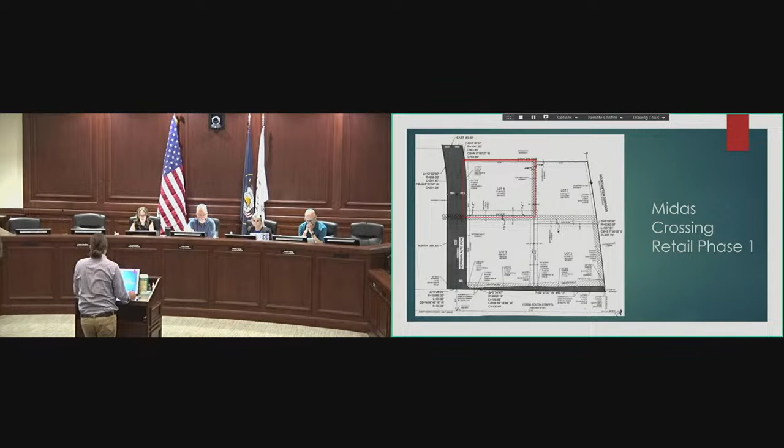This is a conditional use application for Garage Plaza. It's located just down the street off 126, next to Garage Grill. There's the site, it's part of the Midas Crossing Retail Phase 1. Lot 104 is where the proposed development's going on lot 4.

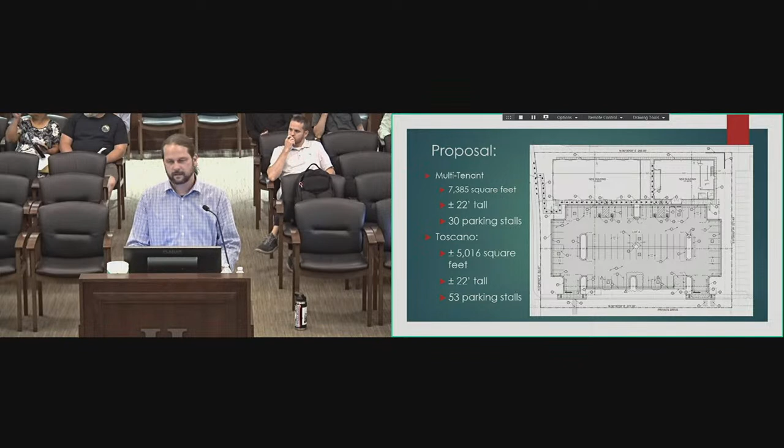The proposal consists of a 7,000 square foot multi-tenant structure and a Toscano's restaurant. The multi-tenant building is about 22 feet tall, and they're providing 30 parking stalls. Toscano's is 5,000 square feet, again about 22 feet tall as well, and 53 parking stalls. I want to say, I think I'm actually incorrect on the 22-foot tall on the Toscano's, I believe it's closer to 32 feet.

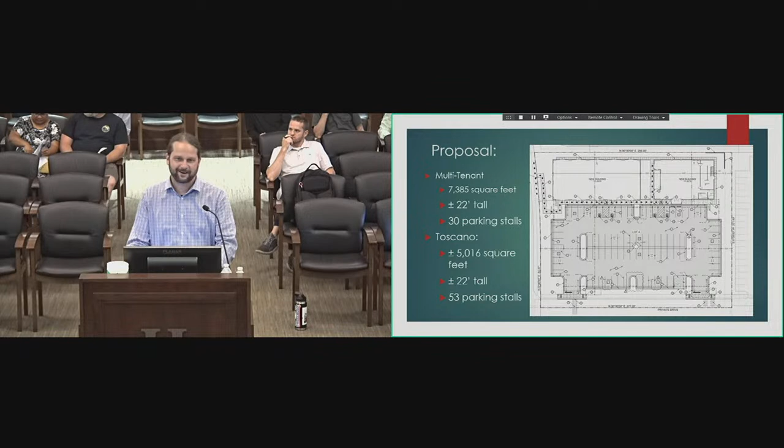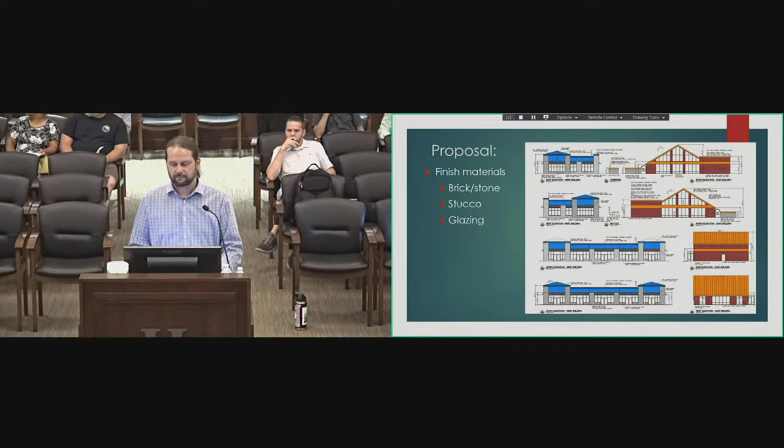Sorry about that. The proposed materials are brick and stone per our C2 design standards, 60% brick or stone on all facades, and they are meeting that requirement. Again, with some additional stucco and some glazing, as we talked briefly in the work meeting regarding their accent band that runs across the building, that is a metal material. It's not part of our permitted finished materials for commercial, but we're looking at that as more of an accent strip, therefore we still feel it meets the spirit of that design standard.

Again, staff findings, there are a few things we considered, a few issues we'd like to address here with the commission. One is the parking. Per ordinance, the required parking for the multi-tenant is 30 stalls, which they are meeting, but for the restaurant it'd be 120, therefore the applicant found that to be a little excessive.

They did provide a parking study. In that study, based on similar uses and taking into consideration the cross parking between lots 101 and 104, they found that to meet their maximum peak times would be 86 parking stalls, and peak time offset would be 83. The applicant is proposing 83 parking stalls.

Staff does recommend and support the 83 stalls, but would recommend that they actually add an additional pedestrian connection between lots 104 and 101, just to provide convenient access for pedestrians if the overflow does go into Garage Grill or vice versa.

On landscaping, there's just one issue that needs to be addressed: along Herriman Auto Row, they're showing a 15-foot landscape buffer on the parking area. Per ordinance, they have to install a 2-foot berm to get that reduction from the required 20-foot buffer.

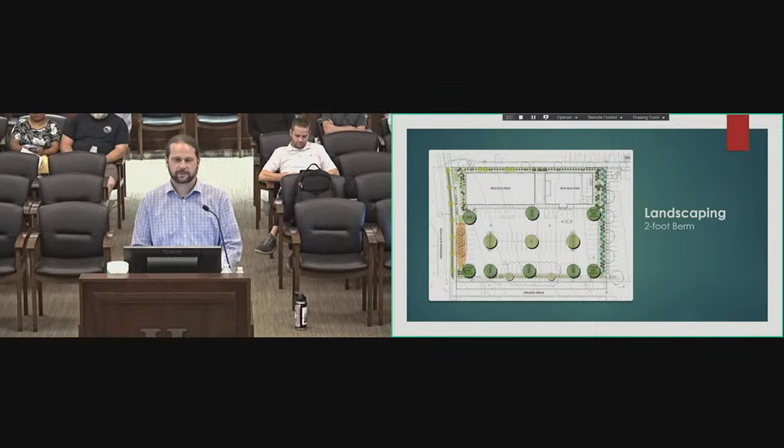Outside of that, staff does recommend approval with the following conditions. If you guys have any questions for me, I'd be happy to answer.

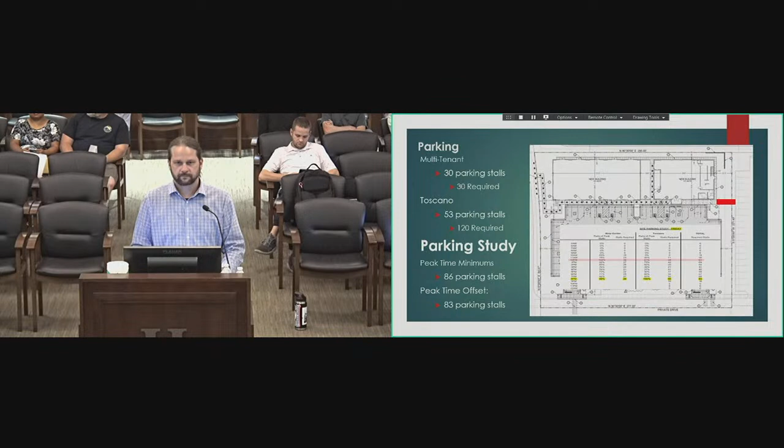I was noticing that pedestrian crossing you were proposing out there — it looks like it's going right into their parking lot on the other side. Is there any concern with how that's tying into the parking lot? There's not really a pedestrian path that it connects to in the other lot.

Right, so they'd have to remove some landscaping to install that. The alignment may be skewed a little bit, so it runs into an actual parking stall, meaning they're not losing 2 stalls or having to restripe their entire parking lot to accommodate that access.

Looking at the plans, there's about a 2-foot grade difference between the Garage Plaza and the Garage Grill site. Since this isn't the primary pedestrian access to the site, it doesn't have to meet ADA requirements, so it could be stepped down with handrails if required per building code.

But they probably will lose a parking stall on that side too when they make this connection. As mentioned, the Garage Grill was required to have 99 stalls and they provided 113.

The applicant says they rarely meet that capacity at Garage Grill, so losing one stall shouldn't be detrimental to parking availability there. That's the only other improvement that would have to happen on the Garage Grill side — they'd just probably restripe out a parking stall.

Yeah, okay, perfect. Andrew, did you have a question? So I had a question.

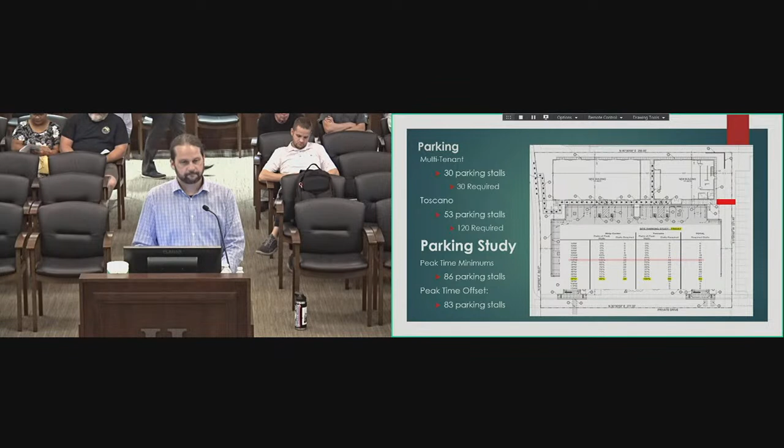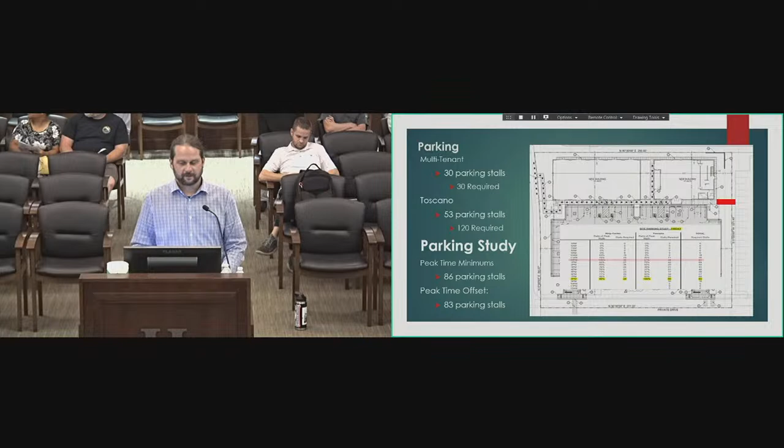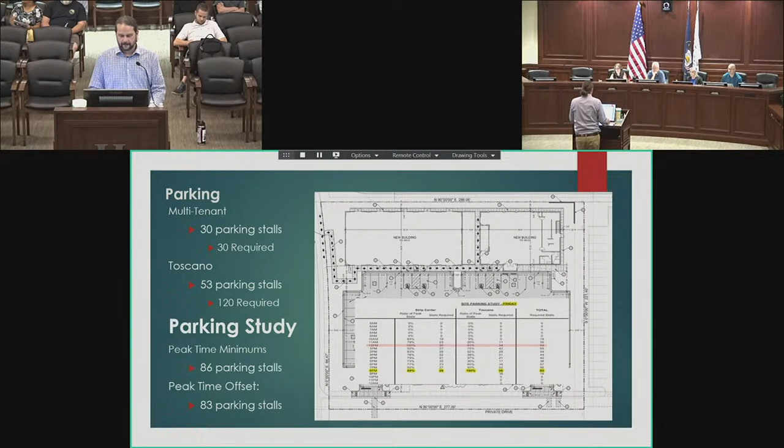If it is underparked and the Garage Grill parking lot is full, where would customers be able to park? Is there street parking nearby they could use, or where would that force them to park? In a case where everything hits its maximum — that's a good question. I'm assuming the shoulder's wide enough that they could probably push that onto Auto Row.

I don't know if that's preferable or not. Again, there's a private access that runs there — they could potentially park there. Or maybe they could open up some of Lot 3, which is undeveloped, to push some of that overflow parking in there if needed.

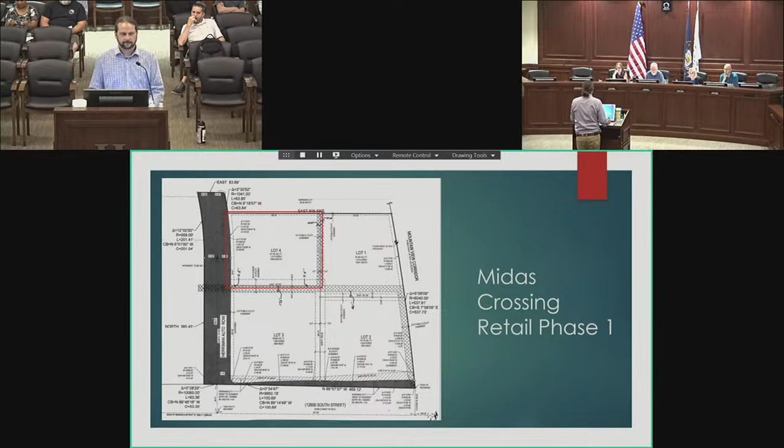Is there a proposal for Lot 3 yet, and is it owned by the same person who owns the other lots? My assumption is — I'm not sure if the applicant owns Lots 2 and 3. They may be able to answer that, but that's a good question for them.

Any other questions for Sheldon? Okay, good, all right, thank you.

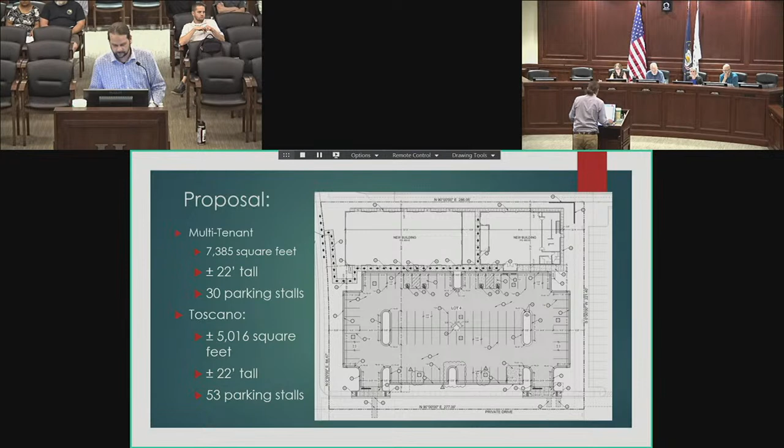All right, if the applicant's here, I'd like to invite them to come forward and provide any additional information. You've heard some of our discussion, maybe answer some of those questions for us. My name is Steve Pruitt.

With regard to the questions that were brought up, in addition to the extension of the sidewalk into Lot 1, there's also an accessible pathway all the way from Auto Mall Drive to the front door of the Garage Grill. So that would make 2 accesses in terms of pedestrian capability.

In terms of overflow parking, we certainly hope we have that problem — we'd love to have it. That being said, there is a recorded operating and easement agreement that provides reciprocal parking, ingress and egress over all of Midas Crossing, all 14 lots of it. So we have the ability and the right to park on the lots that front on 126 South, to the extent that we would ever need it.

Whether improved or not, we have the ability to park on it. I don't like guests to have to park on dirt, but hopefully it'll be fully developed soon enough, and there will be plenty of shared parking as it goes.

Any other items you want to present to us? No, we're fine with all of the conditions for approval. Great, okay, well, thank you, appreciate your time.

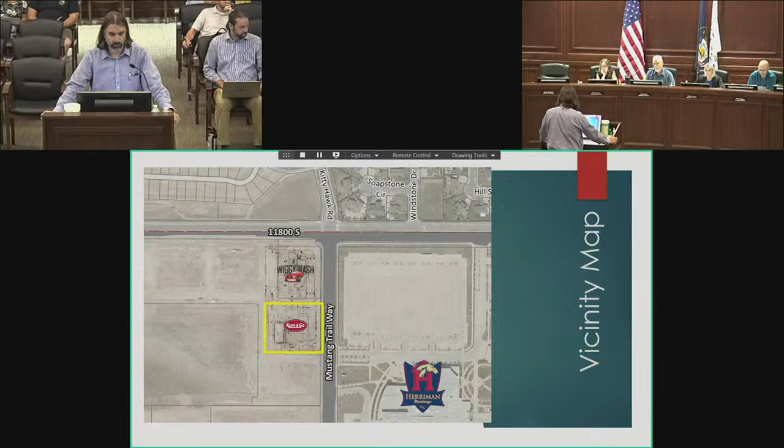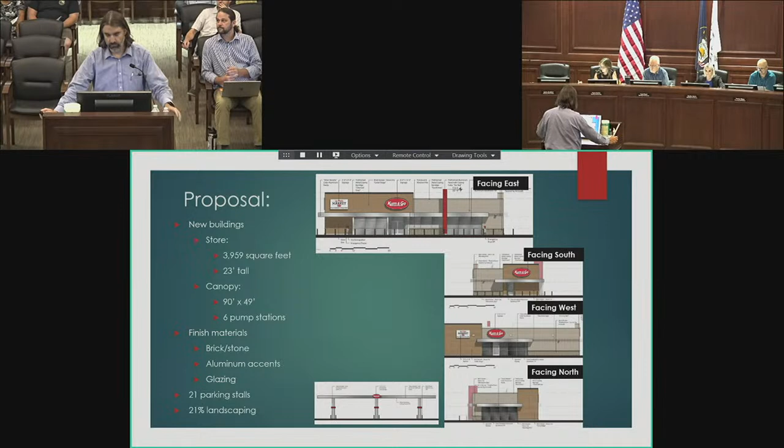So what is being proposed is very similar to what other proposals have been. The store is approximately 4,000 square feet, 23 feet tall. The color and materials is very similar to what's been proposed, as well as the canopy. So you can see those requirements here. They're providing 21 parking stalls and 21% landscaping.

This is the site plan, just to kind of get you oriented with how the site works. So on the right side, running north and south, is Mustang Trail Way. Wiggy Wash - you can see the dashed lines represent the Wiggy Wash site plan. So the store is set back from the street, the canopy's out front. There's two entrances, both of them off of the private streets that are provided in the subdivision.

Dumpster location is on the north side of it as well. So there is good pedestrian connections through here. It ties into the existing right-of-way improvements on Mustang Trail, and then there's a complete sidewalk around the building, which provides good access for both pedestrians and bicyclists who use that site.

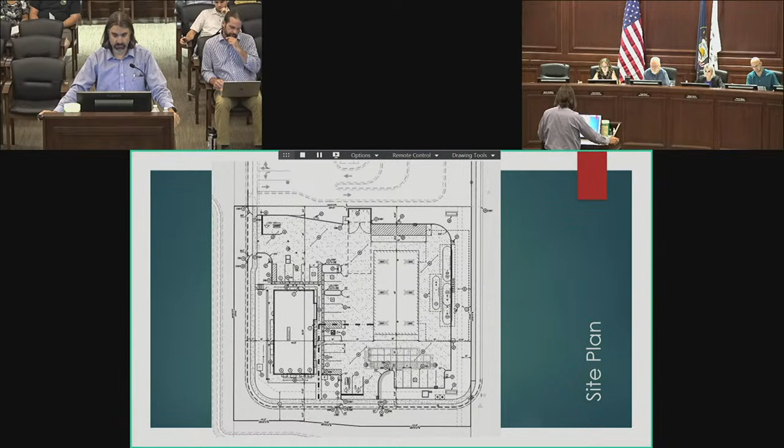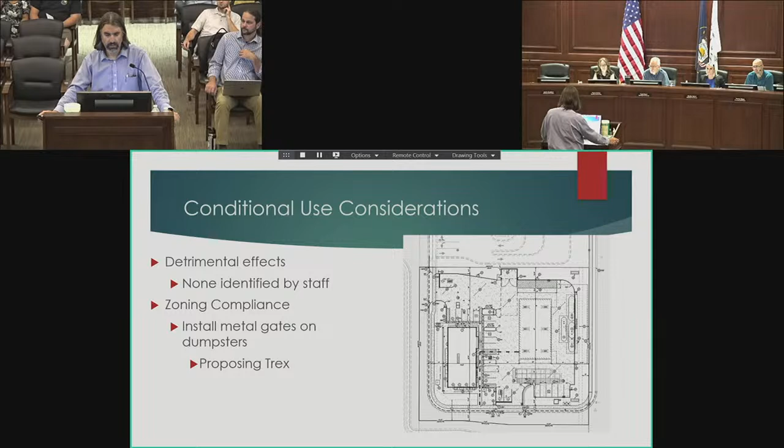So when we look at detrimental effects in the conditional use, there's only a couple of real concerns that we have - actually, we don't have any concerns in terms of detrimental effects. There is a zoning compliance issue, and that would be to install metal gates on the dumpsters. They're showing Trex material, and the city does require those fences or gates to be metal - they seem to last a little bit longer.

So this is the caveat of tonight's discussion. In the MDA there's a provision - there's a couple of sheets, B and B1, I want to say, that outline the colors and the color palette and materials for this development. As Wiggy Wash came in, they were required to - they're a national brand, but they were still required to fit that color palette, and they did so. So there's a section in the MDA that speaks to national brands.

And says that that national brand form and function can continue, but they do need to comply, as staff interprets it, with the color palette of the MDA.

So what's being proposed is similar to what's been proposed at other Kum & Gos. And the material in question is the bright white canopy, or the bright metallic canopy, and the bright aluminum finishes on the storefront and the building itself. The master developer has provided a letter stating that these elevations do comply with the MDA.

But as we looked at it as staff, we do have some concerns and are looking for some clarification from the commission in terms of how this section affects the site and the materials being proposed there. As mentioned, this statement says that a national tenant can continue their national branding, but about halfway through it says those colors and materials should still be followed to provide consistency in the project.

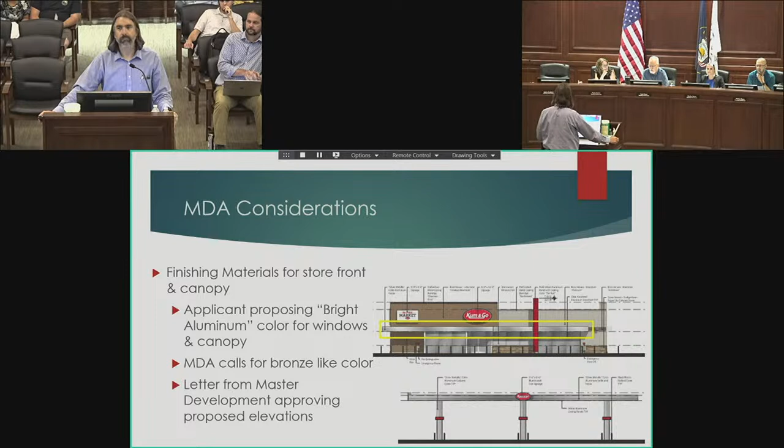So the other ones do have that Copper Mountain color? No, the other ones have the bright aluminum finish. Clint, I have a question—you said that the Wiggy Wash next door was required to use these MDA colors then? Yes. Okay, so the precedent has been set for that. Gotcha.

Okay, any other questions for Clint? I'll leave this slide up so you can look through it, if you'd like, for interpretation's sake. That would be great. The applicant is here, I'm sure they'll address this. Yes, yep, that's the next thing we'll do.

Thank you. We'll go ahead and invite the applicant to come forward to provide any additional information. You've heard the discussion on the color palette as well, so is there anything more you'd like to add?

My name is Taylor Smith. I work with Galloway & Company. We've done the survey and civil engineering on this and the entitlements. We've been working closely with Clint and staff on all the Kum & Go projects here. To answer your question, Commission, we do have one that is built right up the street and one that started construction two weeks ago in Midas Crossing off 126 there.

And we do have another one we're getting ready to submit next week for over by Real Academy. But they all will have that same metallic, silver finish on it. We worked with the developer also on this coloring, and they provided us letters to be able to keep our national brand. Kum & Go has been a family-owned company for over 60 years now, and they've kept these colors—it's kind of a nationally recognized color for them.

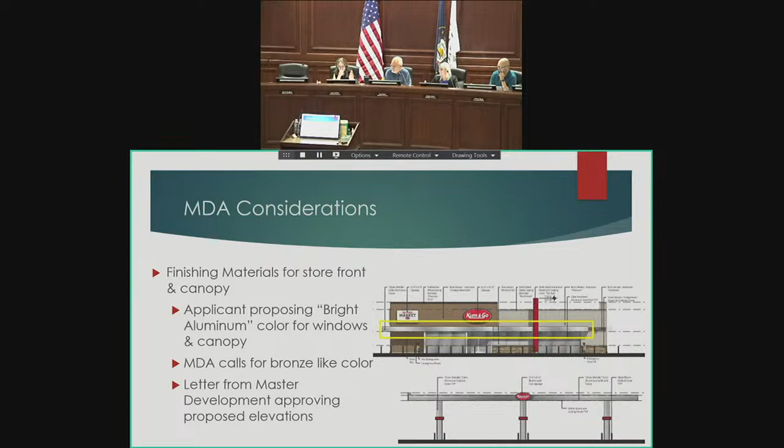Couldn't they technically do that all red too? That's not on the color palette - I mean, there was a reddish color over there. You're saying bronze? No, there was like a reddish color. Yeah, that's bronze, or copper, or whatever. That's the one that might clash a little - it looks reddish, so it's hard to tell.

Again, I get back to master developers provided their thoughts and their approval on it. But an MDA does not mean that the master developer gets to sidestep the actual MDA document - I don't think they are sidestepping that document. The colors being proposed are on the palette. They're not shown here, but they are in the MDA, from what was provided. That color is there in the MDA that they are proposing. I think the intent in the MDA language was national user, and I agree, they've come with our letter of approval.

So I'm ready to make a motion whenever. Okay, go ahead - can we go to the recommendations, please? Thank you. I'll make a motion to approve item 4.2 with staff's 3 recommendations, removing number 2. We have a motion by Heather, and a second by Andrea. We'll go ahead and call for a vote. Preston, yes. Heather, yes. Andrea, yes. And Forrest, no. Okay, that item passes with a 3-1 vote.

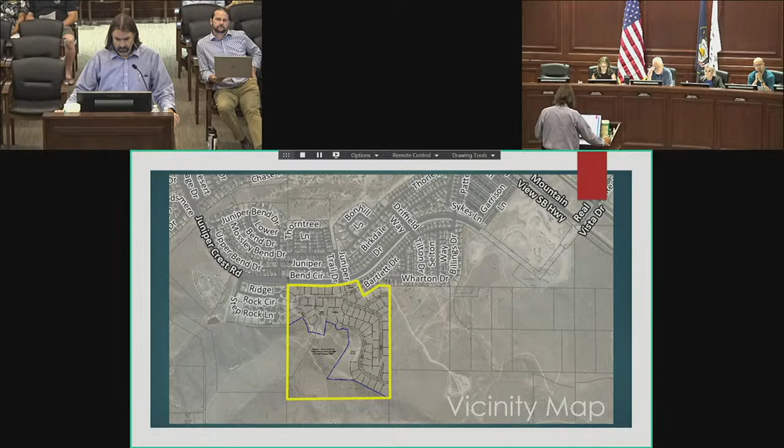Consideration of a preliminary plat for Laguna Pointe subdivision. The location of this subdivision is on the south side of Juniper Crest. This is an outline of the subdivision, put in context with the surroundings. It's 68 lots, getting their main access off of Juniper Crest Road, and other access provided through Bartlett Drive. The proposal is for 68 single-family lots of about just better than a third acre and larger. The property is currently vacant.

Considerations for approval: in terms of engineering, there's minimal concerns there. There was a condition brought up later that we discussed in our pre-meeting today, and it has been recently discussed with the applicant regarding the lots fronting onto Juniper Crest Road - improvements required there include a 6-foot masonry wall, an 8-foot paved asphalt trail, and street landscaping with trees and minimum shrubs for coverage.

There was a concern from the fire marshal regarding the accesses. They are providing 2, but because of the adjacency of those 2, there needs to be a larger separation. In terms of zoning, there is a zoning condition on the property for a maximum of 1.7 units per acre. They're providing 1.67, so just under that.

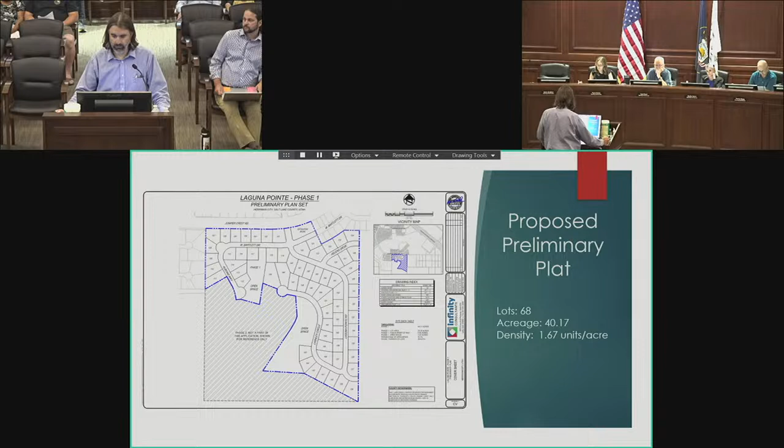This is where, as I mentioned before, they are providing 2 accesses, but because of the proximity of those, the fire marshal had a concern that in order for them to record and develop more than 30 of these lots right now, they would have to provide an additional access that the fire marshal would approve, giving a further distance of separation from those 2 access points. In our conditions of approval, that's our one condition, other than installing the right-of-way improvements along Juniper Crest, which would include that masonry wall, the 8-foot asphalt trail, and the park strip improvements.

So, that being said, yeah, I concur with the fire marshal there - if there's any issue right there at that one intersection, you're blocking both accesses. So that makes complete sense to me.

And they could still move forward with 30 lots as it is. Right - if they want to work with the fire marshal on providing that second access before they record and get that approved, then we can record all 68 lots. Perfect. Any questions? Okay.

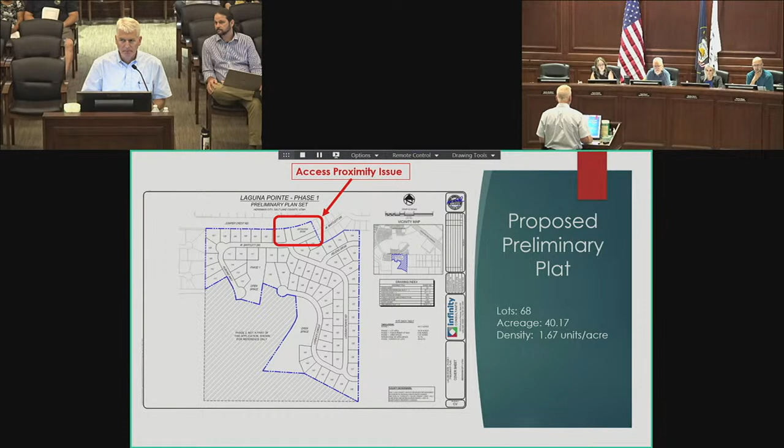I don't know how that affects lot 112 for you, but we'll look at that as we go to the next step. Good comment. Any other questions? Okay, thank you.

All right, this item, as mentioned, is up for a public hearing. At this time, I will open up the public hearing for any comments on this item. Seeing no comments, I'll look for a motion to close the public hearing. I'll make a motion to close the public hearing. We have a motion by Heather, second by Andrea. All in favor? Aye. All right, we'll go ahead and close the public hearing at this time.

Any other discussion from Planning Commission on this item? Maybe just a quick question for staff. So on lots 144 to 138, those areas are part of the hillside overlay zone, right?

Partially, if you go to the map that shows the hillside overlay, there's a figure that shows that. I did notice that as well. Yeah, you can see that overlay zone goes through those lots. Right, so those lots would be affected by that hillside overlay, which speaks to how those need to develop. They just need to provide some additional information in terms of hillside safety and grading. On the plat itself, it does show a 30% slope line where they can't even touch those slopes.

But the rest of it could be developed, and these are larger lots. So there is still developable room, plenty of room to put homes. But is the city okay with how it's looking right there with the line going through those lots? There's special conditions it sounds like that the developer would have to do.

To do anything else within those limits. Right, and sometimes that can even go into more of a detailed study of the property. I think when the hillside overlay was done, it was on a rougher scale. As they come in for each of those, and as they've done on their preliminary plat, they've shown that 30% grading slope through those properties.

That gives us a little bit better idea of where those 30% slopes really exist. Our hillside ordinance or hillside overlay is just to keep tabs on where those impacts might land on certain developments. So with a more specific design in place, we can better mitigate and require improvements for when they're actually built out.

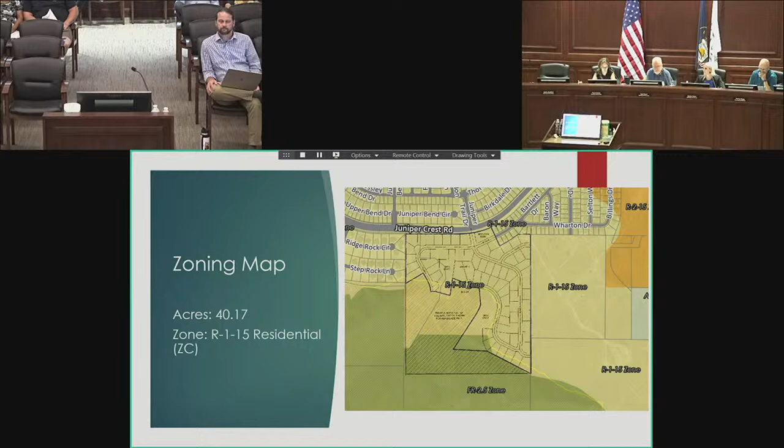Anything else? Thank you. Any other discussion, any other thoughts? Your motion? By somebody other than Heather? I'm kidding. If Adam was here, he'd be doing them all too.

So, I'll go ahead and make a motion to approve item—which one is this? 4.3, along with conditions 1 and 2, with a modification to 2, that is working with the fire marshal to provide appropriate access. Permanent access? Yeah, that the fire marshal would approve, to meet the fire marshal's requirements.

Okay, and then didn't staff have a third condition for the lots 101 to 107? Oh, and a third, we didn't discuss that. Let's withdraw that motion, let's have a quick discussion. I'll go ahead and withdraw that motion. Yeah, sorry, Forrest. Did you write those down? I've got them written down here.

But let's talk about it quick, and maybe we need to make sure the applicant's okay with this as well. If you go back to the map, lots 101 through 107 that are adjacent to Juniper Crest Road, we want to make sure there is an 8-foot asphalt path installed along there, as well as a precast wall, and that the park strip landscaping for these meet the updated city standards. I believe that was the recommendation there, so.

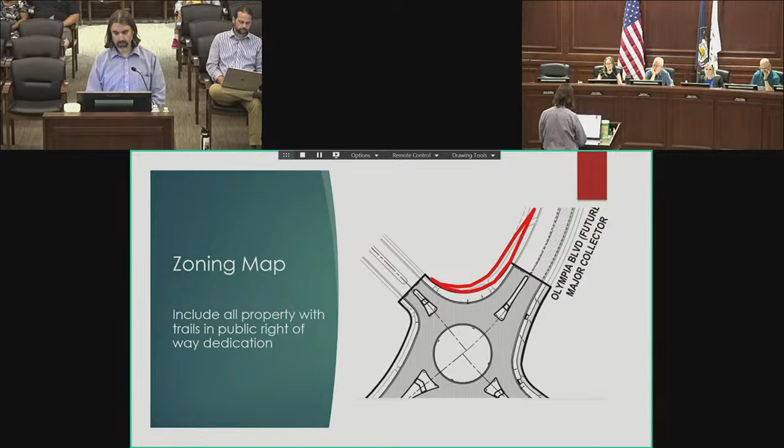In terms of engineering, very few concerns. For zoning, the only correction we would have, as you look through the plat, there was one section highlighted red. Wherever you have a trail that acts as kind of a public access or sidewalk along the adjacent roadway, we just want that included in the dedication to the city for maintenance and access and all those kinds of things. So that's the only caveat there.

In terms of MDA compliance, they do comply with their MDA that they've provided. We've been working for quite some time, going back and forth with the developer on several issues. They've been very cooperative and provided quite a few betterments for the development to make it a little bit better than most.

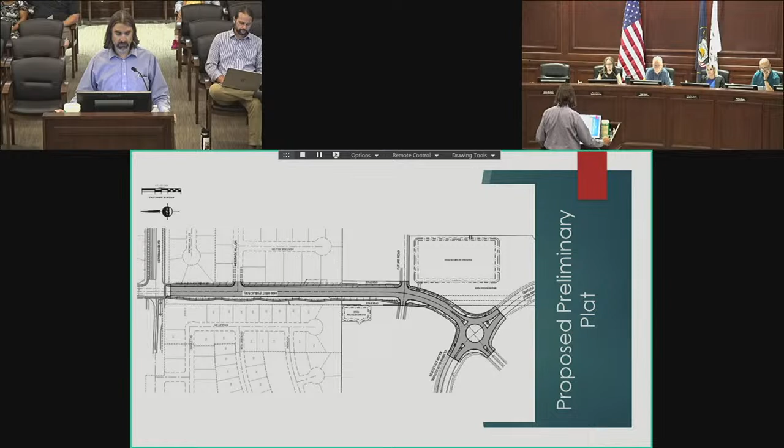And then the design of the roundabout here provides quite a few pedestrian amenities. You get a lot of pedestrian islands where that road could be quite large, giving you an island to go out and rest on until you make your way across the entire swath of road there. Better than most landscaping plans as well.

So that being said, these are the conditions there. They're, like I said, very minimal. And if there's any questions, I'd be glad to answer them.

The applicant is also here on this one. Great, thank you. Any questions for Clint?

Well done, I like the roundabout. It looks really nice, looks really good. Good design, good landscape. Okay, we'll allow the applicant to come forward and provide any additional information.

Anything more on this item? We're going to probably see you a lot tonight on this dedication tonight. We're up for a few of them.

I'm Kirk Young with the development team. Just wanted to stand up and thank you for allowing us to come forward tonight, and thanks to all the city staff for the hard work that's gone into this. It's been a lot of hours of meetings and reviewing drawings, so we appreciate it. We're really excited to get Olympia started and appreciate your time.

Thank you. The staff also gave you a great compliment during our work session, so thank you for what you're doing. Any questions before we let them sit down? No, that's fine.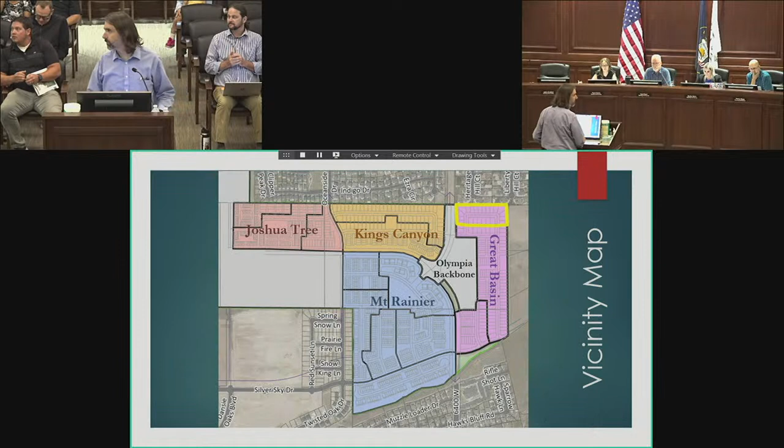Going to the subject property, this colored map gives an overview of all the applications we've received so far from the Olympia Group. The MDA states the only plats that need to go through a public process to the Planning Commission are those lots and developments directly adjacent to already privately owned and developed residential lots. For example, Great Basin is all of that purple area, but we're only looking at this one phase of development directly adjacent to the existing lots above it. Same with Kings Canyon. As you move over to Joshua Tree, all three of those phases have frontage onto privately owned lots, so that entire development will be considered tonight as well.

So going back to Great Basin, this is a very simple proposal. We're looking at 22 residential single-family detached lots. Minimum lot width is about 50 feet. The density meets the MDA requirements. The access is one thing I might point out.

As we just looked at that Olympia backbone, you can see that in order to get to this development, you have to go down 6400 West, and then through a neighborhood street, that Great Basin Phase 1, where that entrance street off the major backbone street comes in, and then you'll get access into that subdivision. That's reflective in our conditions of approval, and I'm certain that's the way the developer intends to develop this.

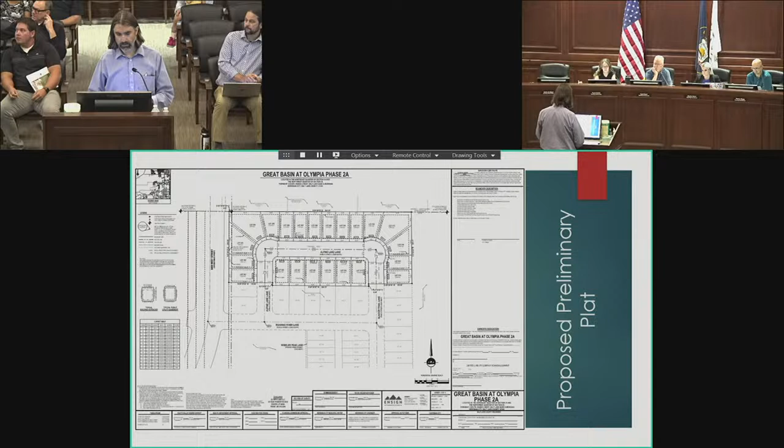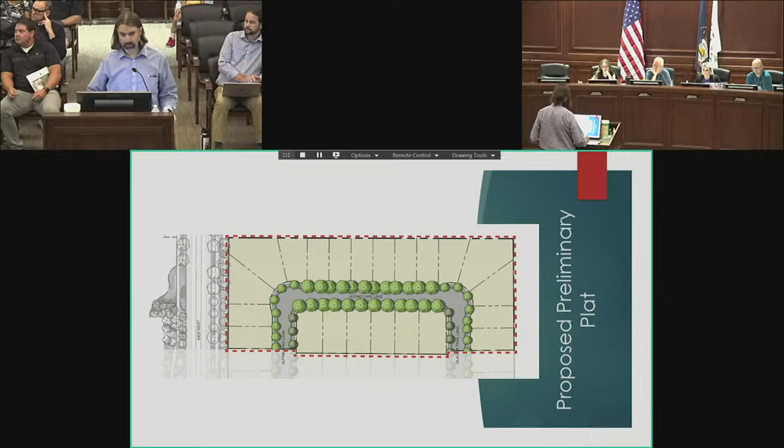Here's an overview of the lots, pretty standard single-family detached. This gives a better idea of the context of landscaping and streetscape we're going to be looking at, and here's another overview of the landscaping. If there's any questions on this one, I'd be glad to take them, but hopefully we've explained this one okay. Any questions for Clint?

Okay, thank you. All right, Kirk, anything more you want to come forward with, any additional information on this one for Great Basin? I wanted to ask a question - I noticed the smallest lot was going to be about 4,900 square feet. What size houses are you tied to on that?

Do you know? What do you mean, like the width of the house? Just the square footage footprint. I don't really have the ranges, but those houses will typically be about a 40-foot wide home. 40-foot wide on a 50-foot lot, okay, so 5-foot side yards. Yeah. Does that answer your question?

I'm just curious on the square footage, like if you're going to put a giant house on a tiny lot, or if you're going to scale down the houses to fit the lot better. It'll just depend on the house plan - they'll have a lot of ranges. The main floor may be as low as 1,200 to 1,300 square feet, and up from there, depending on what the buyer chooses. They still have to meet the required setbacks and offsets, but obviously, yes. Okay, any other questions?

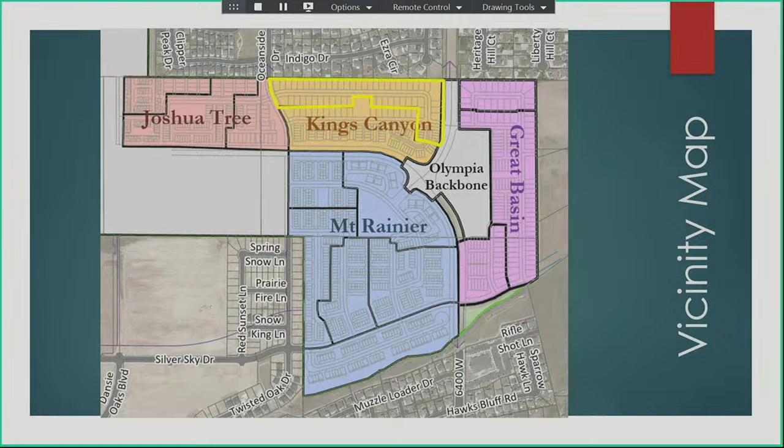So I think we're just moving to the west here. On the east side of 6400 West, we did Great Basin. You can see the highlighted area now is moving to the west. This includes mostly single family, with some attached units in the southeast corner of that yellow portion of the plat.

So there's 61 residential lots, I guess 9 single family detached units and 52 attached units. That's flipped, right? Should be the other way around, 52 single family detached, 9 attached units. That's important, big difference. Yeah, I was looking and thought wait a minute, you look at those lots and can see where the attached and detached units would be.

So obviously access off of Oceanside Drive and 6400 West. Their open space is just over 5%, and their density does meet the neighborhood designation.

Again, with all of our zoning comments, it's mostly going to be making sure that subdivision plats are recorded, that the correct dedications take place so that there's appropriate access to each of those phases of development, which I'm sure the developer is savvy of and wants to have happen as well.

On this one, we do provide that caveat to work with staff to update the land use plan in the MDA. That can be done administratively per the MDA, and I'll be trying to schedule a meeting probably in August. When I spoke with Ryan Button, he wanted to meet with staff to look at how that process would work and what exactly the city is looking for. We just want to make sure that as development takes place, we get an accurate depiction of how the project is developing.

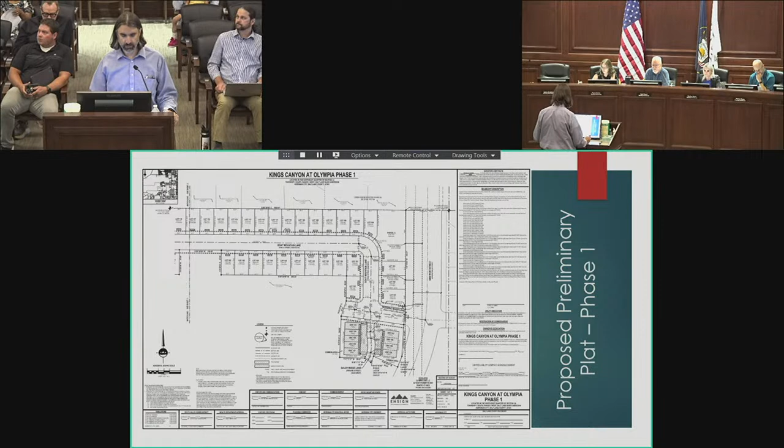Again, in terms of zoning and MDA compliance, there really isn't anything out of place here. What's being proposed does match their MDA. This is their overall landscape plan for this part of the development.

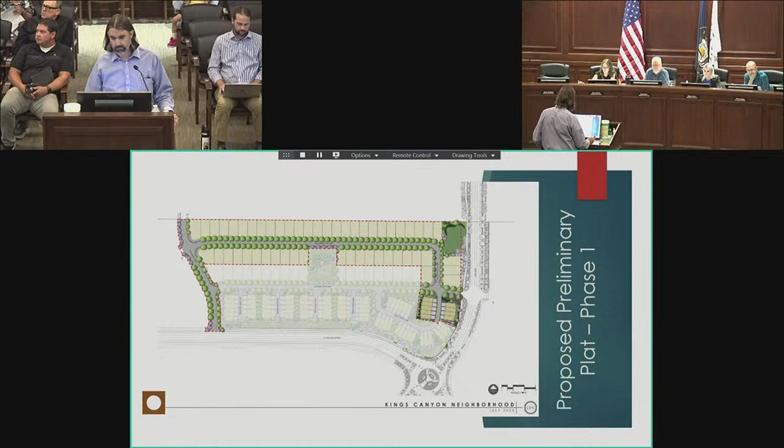And just another couple of the lot layout, the landscaping here, the specific plan anyways. So really, same conditions on this one with the addition that they work with staff to update those master plans, specifically the land use plan to show the correct density designations.

Excellent. Any questions for Clint? All right. We'll let the developer come forward again, provide any additional information you have. I do have a couple questions that have come up, but anything more you want to add before I ask my questions? Nope, not on this one.

Okay, so a couple questions that have come up. It's a little different how we're seeing these. The questions are from the public, but I appreciate them anyway, and I'll go ahead and ask them on their behalf. So these developments that are coming in, there's been some questions asked about, are they going to be single-story, two-story, three-story? What type of product are you looking at for all of these developments coming in at this time for tonight?

Throughout the whole thing, on all the phases we're showing tonight, there'll be some 2- and 3-story. On these in particular, most of those I'm guessing will be 2-story, but not over 3. There'll be some single-story as well. Yeah, but I would guess on these smaller lots, you typically see 2-story, or at least a 1-story with a kind of a loft up top. So that'd be my guess. Basements as well, likely as well, right? Yep.

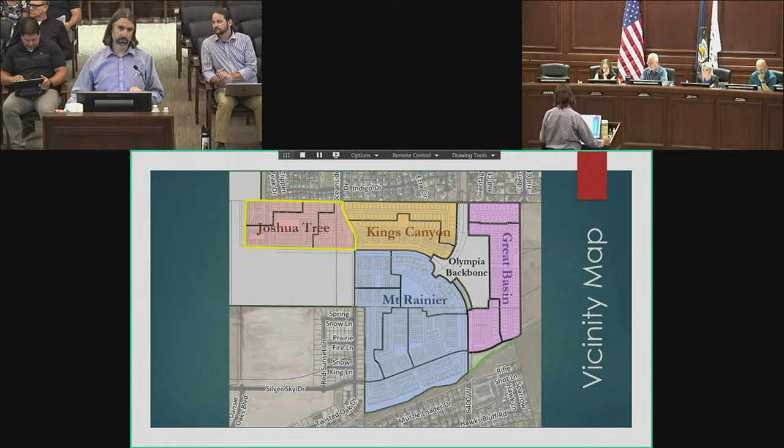All right, so this is the Joshua Tree development. As I mentioned before, all three of these phases touch on existing residential development, so all three need to be considered by the Planning Commission. There's 210 residential lots, 55 single-family detached units, and 155 attached units. And that is the actual number, that's correct.

Access comes from Oceanside, and then as part of the Olympia backbone dedication, there will be that construction access that comes down off of Olympia Boulevard and back up, ties up on the west side of Joshua Tree back up to 126.

This one does include a 1.2 acre park, and 28% of it is provided in open space. The density in this development is about 12 units an acre, which falls into that village designation in the MDA plan.

The only concern from zoning, in addition to making sure there's adequate access, is to ensure that there's 50% live growth achieved in all landscaped areas. Looking at the landscape plan, that was pretty evident, but just to make sure as we get into it with a little more fine detail.

And then working again with staff to update the land use plan. I believe this was shown as part of a neighborhood overall when it should be a village. So as this gets developed, we just want to make sure those plans accurately depict what's taking place.

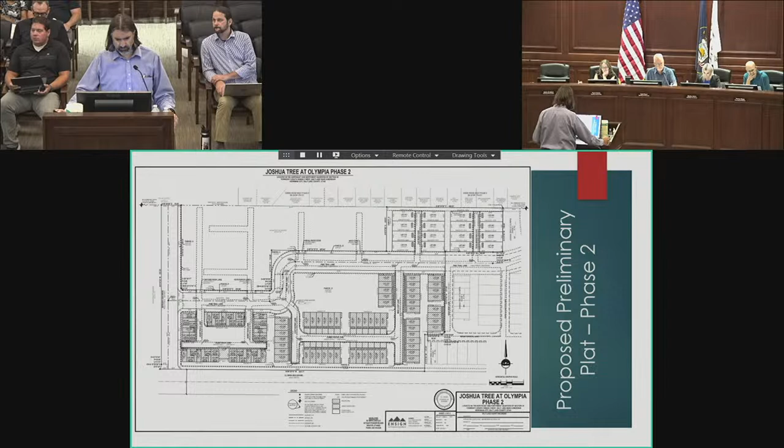So you can kind of see the layout of the neighborhood here. It seems like the further west you go, the more density you get. There's the centrally located park. The applicant has provided, in several of these sections, some bump outs along the streets for improved pedestrian access across those streets.

Bump outs, but not raised. The curb extends comes out, so wherever you have enhanced street crossings, you'll have one of those little bump outs that makes that pedestrian connection a little closer.

I've gone through this several times and looked at sidewalk connections and making sure that those line up and make sense. You're not on a sidewalk and all of a sudden you're in the middle of nowhere. So these pedestrian connections do comply with the MDA as well as the plan itself.

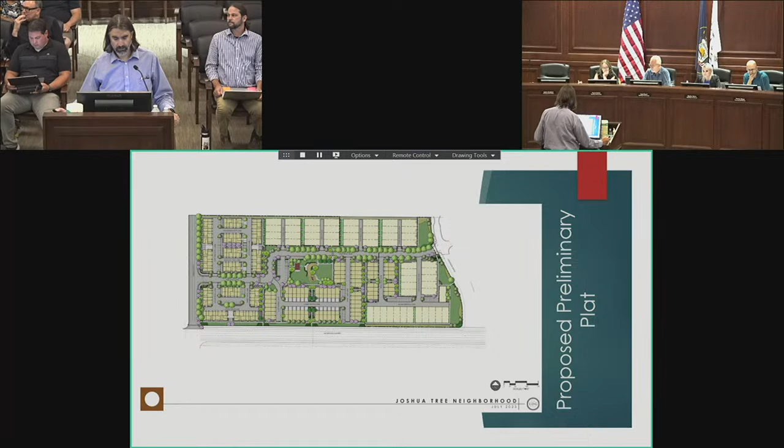So that being said, I'm just going to go through these plans. If there's anything you want me to stop and look at, just let me know. But you can kind of see, and this is a good example of where these bump outs are. On Goat Mountain Lane, about halfway through the page, you can see an example of one of those bump outs.

And then I think this is where that 50% coverage came in. Just in the park strip here, it didn't look like that 50% was quite being met, so we wanted to make sure that that was indeed being met as the standard.

And then in a previous iteration, there was a misinterpretation of the sight triangles. So you can't have a tree in a sight triangle, but it was being based off of a different standard. So when I went and talked to engineering, they said this could be looked at on a different standard that would allow more street trees to be replaced in these park strips, specifically along this little stretch of road. So we'll just work with the applicant and make sure that they were actually provided in an earlier plan and then taken out, so putting them back shouldn't be a problem.

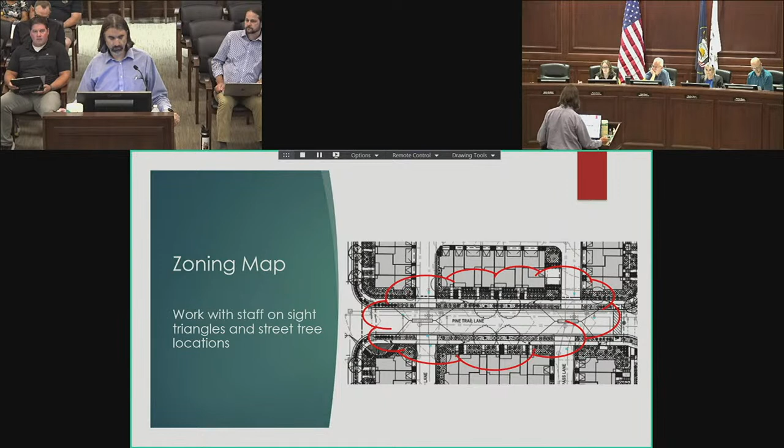So again, just a few more conditions, in terms of the street trees and sight triangles, and then the 50% coverage as well. But other than that, pretty standard. Any questions?

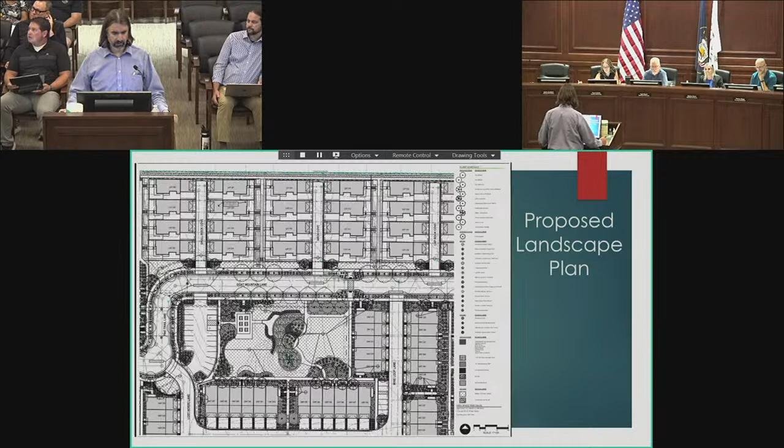Clint, what size was the park on this one? The park was just over 1 acre, I think 1.2 acres. Do you know what they're planning to put in there? Yeah, this plan here kind of shows what's being provided in that park. So there's a little playground, a pavilion area, there's some trails that go through there, some grass areas for play and stuff.

And then on which one had the 7-acre park? Was that the Olympia first one, the backbone? Okay, and staff will work on that park with them? Yeah, that's going to be publicly dedicated, so they're working with the city on what amenities will go in there, what that will look like.

I have a question for you, Clint. On that little park, is that amount of parking there a required amount, or is that just voluntary, them putting in parking right there? Yeah, it's pretty much voluntary. There's not a requirement in the MDA for a certain number of parking stalls based on the size of the park. Since this is privately owned, it's pretty much up to them to provide the parking.

I did have one more question. Will this be an HOA? I'm sure it will, yeah. Yes, all of Olympia will be part of a master HOA. All of Olympia will have an HOA? Okay, thank you.

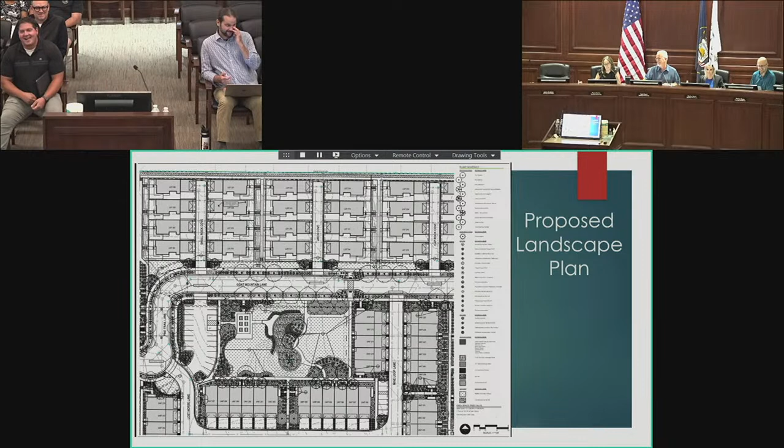Great, any questions? They're both standing. Get them now. I guess my only concern is... We'll ask questions, this is on for a hearing. We can get comments. Yeah, so if there's any questions, if not, we'll do a hearing and then we can have some discussion, if you're okay with that.

Again, this is item 4.7, on for a public hearing. At this time, I will go ahead and open up the public hearing for any additional comments. Seeing none, I'll entertain a motion to close the public hearing. I'll make a motion to close the public hearing. We have a motion by Preston, second by Heather. All in favor? Aye. Very good, we'll go ahead and close the public hearing at this time.

Go ahead, Preston, you said you had some questions or comments? Yeah, I just had a question/concern. I see you have parking kind of dedicated throughout this development, and then adjacent to the park, you don't have as much parking dedicated, which is fine. I'm just wondering, is the parking next to the park kind of planned to compensate for that, some overflow parking of sorts?

I could see it being used a little bit for that, but all these units have a two-car garage at a minimum, and then we've got on-street parking allowed as well, so all in all we've got plenty of parking. That's one of our big concerns, as you drive through like Daybreak for instance, there's a lot of cars out on the roads. That's what we've tried to provide, especially in these townhomes and things, garages, so they've got their own space.